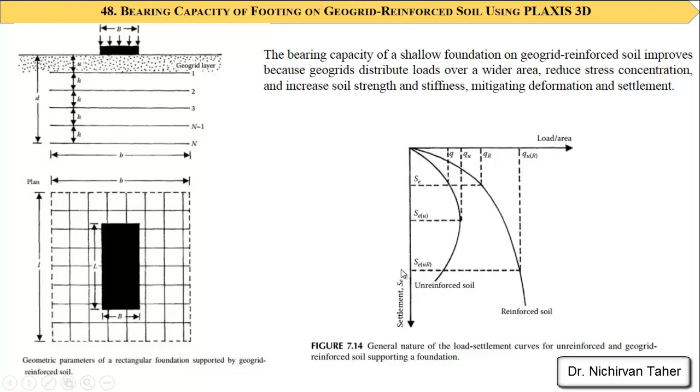Okay, the problem which we are going to solve in Plaxis is shown here. We have a square foundation which is 1 meter by 1 meter, and also we have the geogrid sheets which are also square, 4 meters by 4 meters, and the soil contour will be 10 meters by 10 meters, and the depth of the soil will be 5 meters, and the soil is a sandy soil in this example. By the way, geogrids are more efficient in sandy soil compared to clay soil.

And we have the foundation also. The thickness of the foundation is 0.5 meter, and we will use 3 layers of geogrids, and the first layer is located 30 centimeters below the foundation, and the distance between the other geogrid layers is also 0.3. So as you can see, this example shows a full geometry.

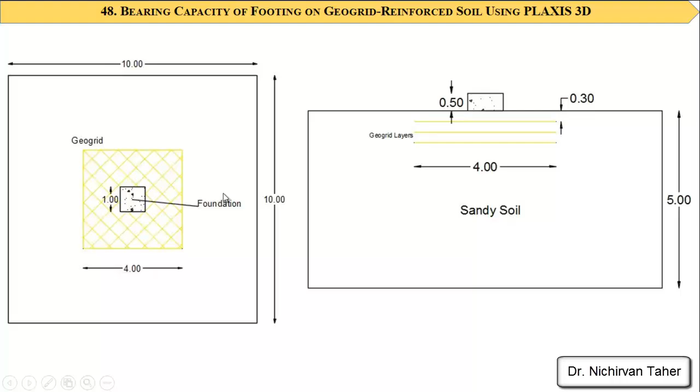So to decrease the calculation time in Plaxis 3D, we are going to model 1/4 of the problem, as we did in some previous examples, and we have covered it in detail, I think, in one of the examples. So we will model it like this. This is the 1/4 geometry of this problem. So as you can see, the problem will be like this one.

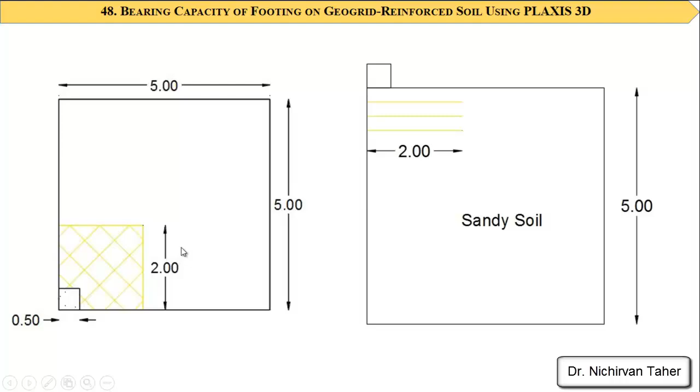So the geogrid length will be 2 meters, the soil contour will be 5 meters by 5 meters, and the foundation dimension will be 0.5 meter by 0.5 meter. After calculating this example in Plaxis 3D, we will get load displacement curves like this one. As you can see here, this is a load displacement curve for unreinforced soil, and this one is a load displacement curve for geogrid-reinforced soil.

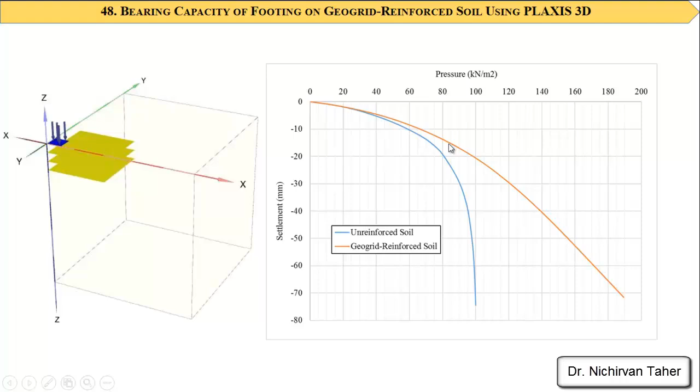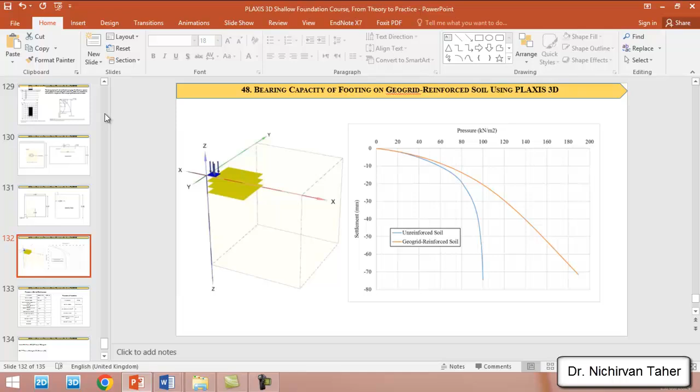And as you can see here, these load displacement curves are in good agreement with the theoretical load displacement curve from the literature. Also, the axial stiffness of the geogrid is calculated as the tensile strength divided by strain, and generally it is calculated at a low level of strain, maybe 5 to 10 percent.

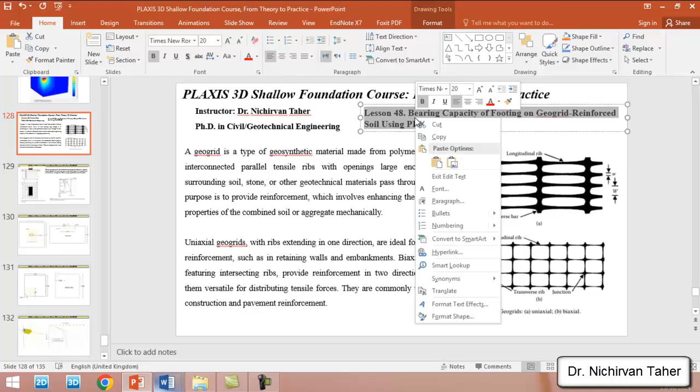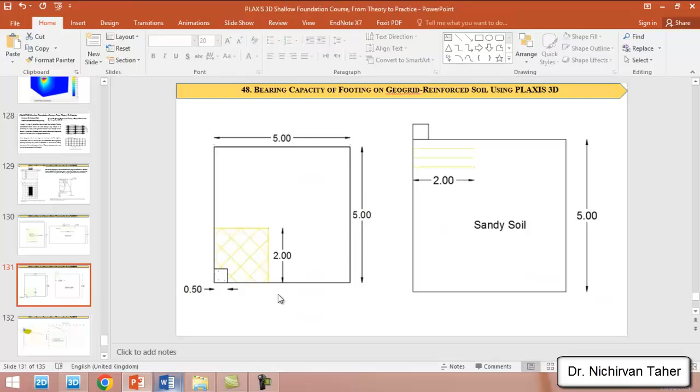Okay, let me open the Plaxis 3D file. I will copy this name for the new Plaxis file. I click on the Plaxis 3D program and start a new project. I will copy the title here, and as I said, the model will be 5 meters by 5. So this one will be 0, this one 5 meters, 0 and 5 meters.

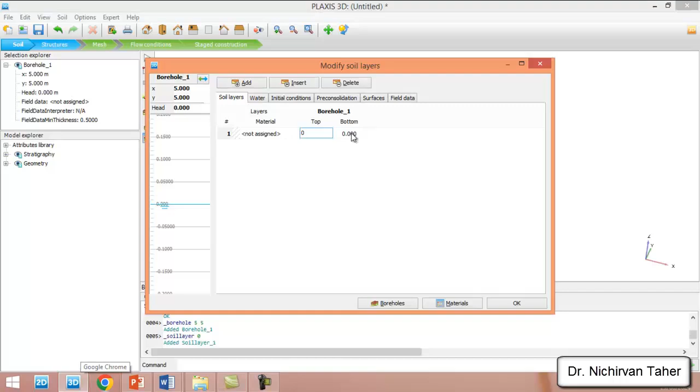Okay, after that we create a borehole. I select here and add one single soil layer, which is 5 meters. I will assume the top to be 0 and the bottom to be -5, and I will not consider the water table, so I will set it at -5. After that we have to define the material for the soil.

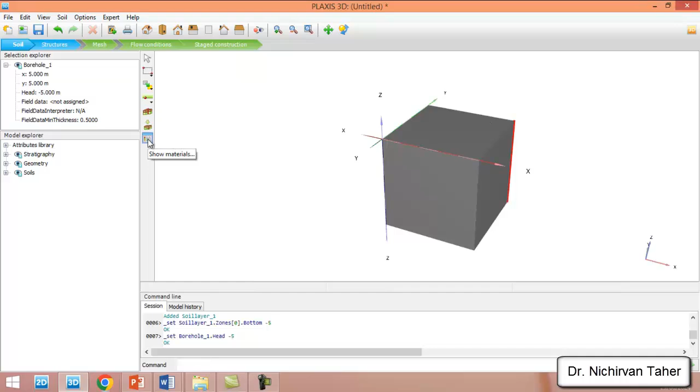So I click show material, save again. I think everything is ready now. We can start the calculation, so I click on calculate.

As I said, in this tutorial we will first investigate the effect of the geogrid on the bearing capacity of an isolated footing. That's why we have two construction phases. In the first one, we have unreinforced soil. It means the foundation is on normal sandy soil with no reinforcement. We will check the bearing capacity and settlement in this stage.

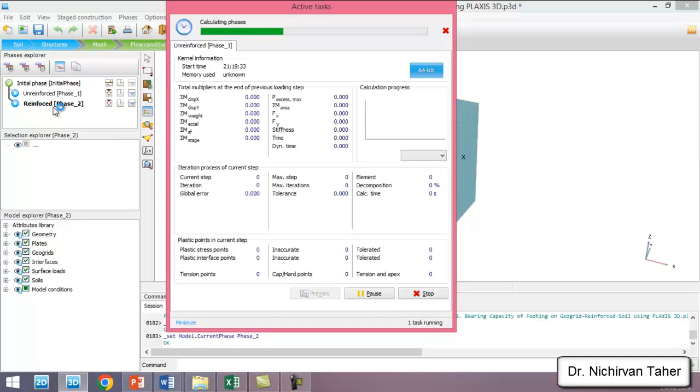After this stage, we have the reinforced phase. In this phase, we have geogrid-reinforced soil, and we will see how reinforcement using geogrids affects the bearing capacity of the foundation and the settlement. It may take some time, so let's wait until the calculation is finished.

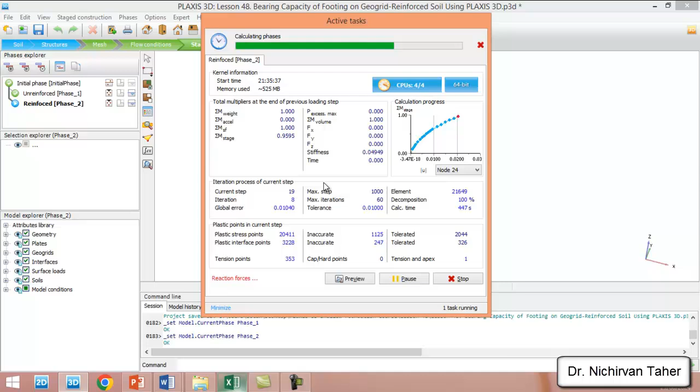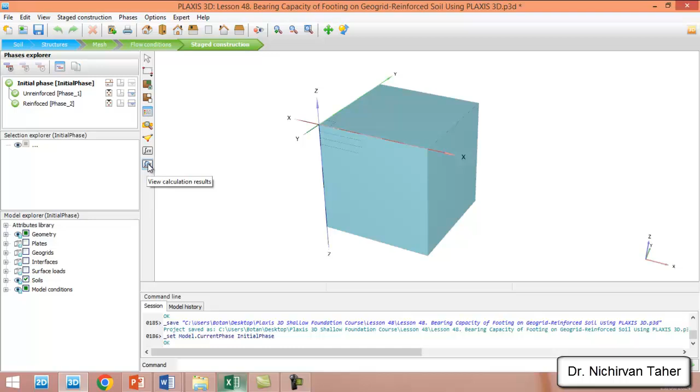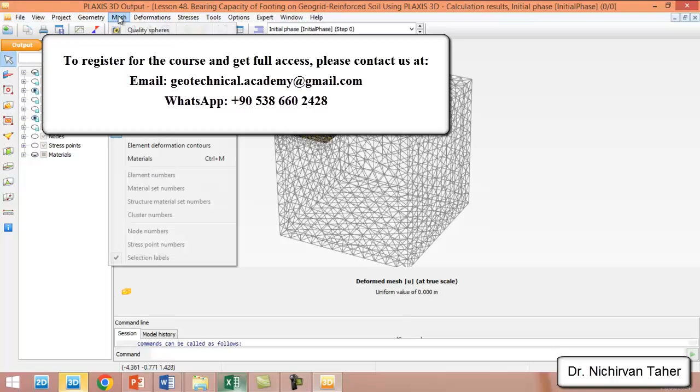Okay friends, after a long time the calculation is completed. We save the project again, and I will start viewing the results. So we click on view calculation results. As we can see, this is the initial phase, and in this phase we don't have any deformation. So we click here and select the unreinforced stage construction.

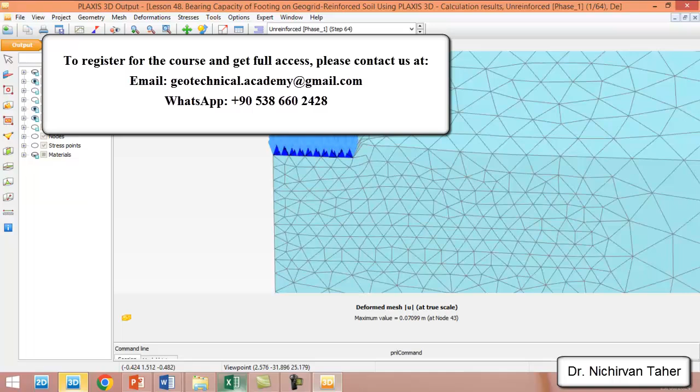So this is the deformed shape of this stage. As I always say, this is not true scale, so I click on view scale and select true scale. This is the true scale deformation of the problem, and the maximum displacement or settlement for the unreinforced case is about 7 centimeters.

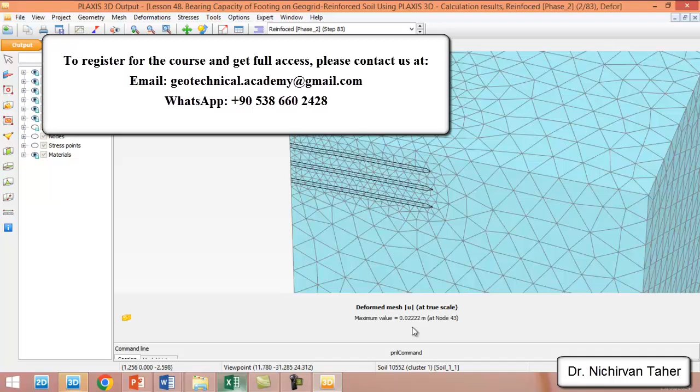And if I select the reinforced case, the maximum displacement is about 2 centimeters. So we can see how reinforcing the soil decreases the settlement of the foundation. Let me draw a line, maybe like this one.

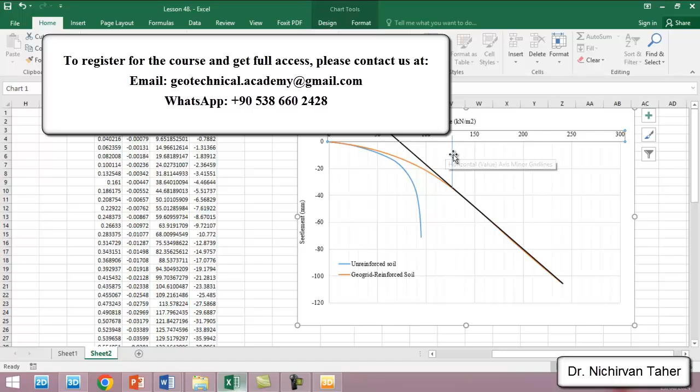We can see that after this point, the slope of the load displacement curve becomes linear. So we can say this point is the ultimate bearing capacity of the foundation for reinforced soil. We can add minor grid lines; yes, it is 10. So this one is 110, 120, and it is about 130. So the ultimate bearing capacity for reinforced soil is about 130 kilonewtons per square meter.

The bearing capacity ratio is the ultimate bearing capacity of reinforced soil divided by the bearing capacity of unreinforced soil. We can see the bearing capacity increased by about 40% from the unreinforced soil.

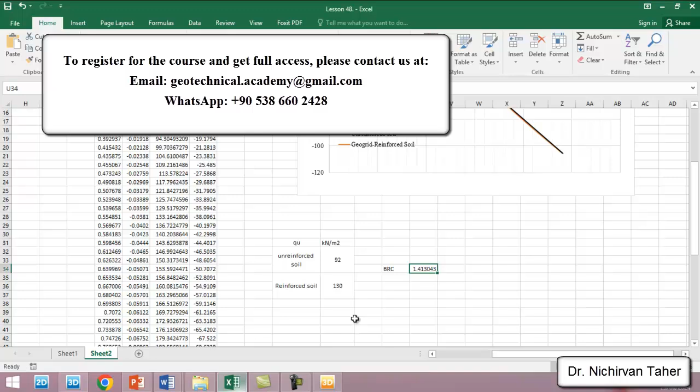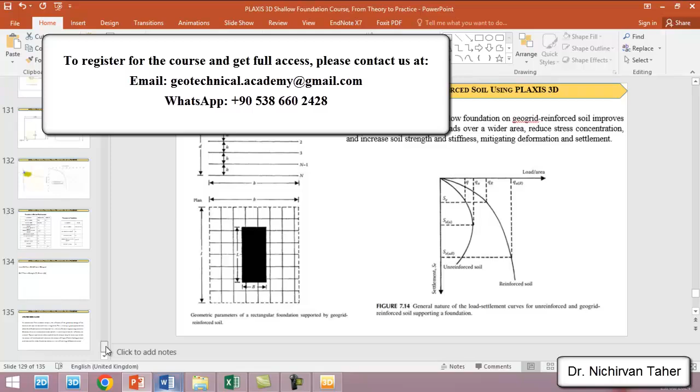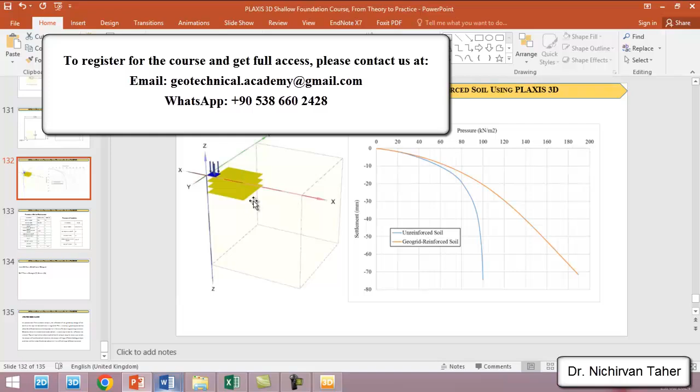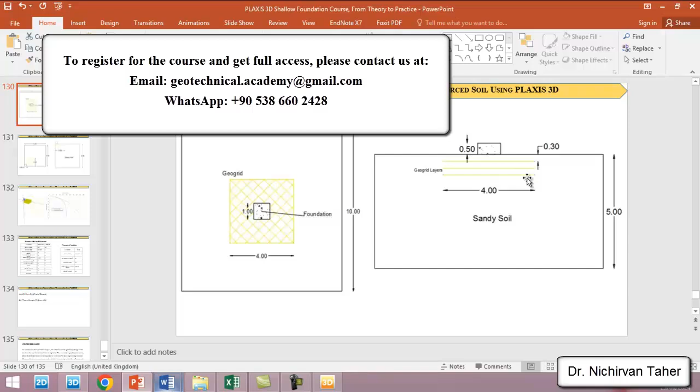So this was this example, and this is a very important and interesting topic, especially for researchers who work on this kind of project. As I said, this data is for this problem, and you can change the location of the geogrids, increase or decrease the number of geogrid layers, and the geogrid dimensions, to see the effect of each parameter on improving the settlement and bearing capacity of a shallow foundation.